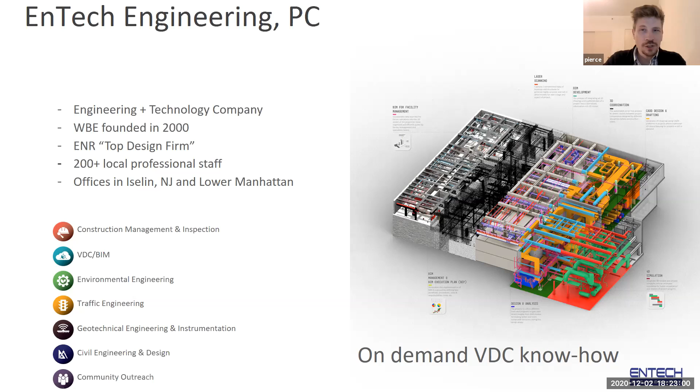Speaking of VDC, I think it's important to couch this whole thing in my particular take on what VDC is, what the role means. In general, I think everybody on this call knows that it's a disciplinary umbrella for all the technology in the AECO industry. The way I look at it is that it's like product management. Product managers in the software and technology world sit at this nexus between the people who make the technology, the customers who buy the technology, and the business itself that's thinking about what the profitability is going to be and what the future of the business is. And so product management sits in that middle spot.

I think VDC has a similar role, except our client is the project team. And once again, I'm coming from a specifically construction background here. And then our business side is our stakeholders, which are our owners, our account executives, the partners at the architecture and engineering firms we work with, and we're really trying to help everybody connect and bring that all together around technology.

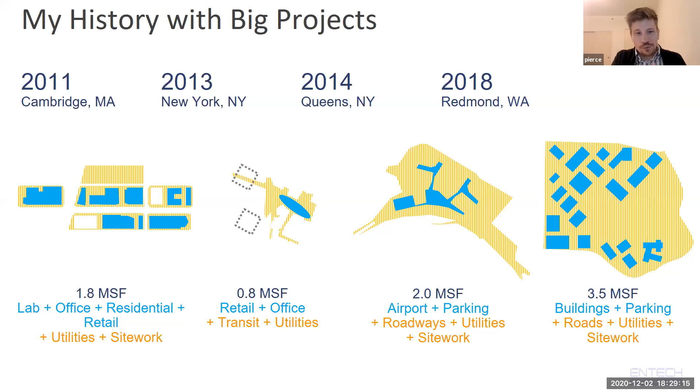And the last thing I worked on at Skanska was this Microsoft campus out in Redmond, Washington, just outside of Seattle. I would fly out to Seattle once a month, and it had 15 buildings, 3 different primes and 5 different architects, I think. Just this massive sprawling campus of a project. I was brought in to do the BIM execution plan. It was a great moment because I had just spent all these years learning all these things on LaGuardia, and now I could come in to help. When you'd go into the meetings, 15 different entities would be in a room. We had to have this giant room with 20 people in it in order to go through issue by issue what we were going to figure out.

So that's the history. What does it mean when we talk about scale? I think we talk about it along two lines. The first line is size. That's the physical extent of the thing, just how big the thing actually is; the temporality, which I also mentioned, the fact that big projects take a long time to design and build, so the decisions you're making have to work not only now but 5 years from now; and then multiplicity: not only is the thing big, but it's made out of a lot of things. So you don't have to do something just once, you now have to do it 100 times, 1,000 times.

The second line that we think about scale along is complexity. So interdisciplinarity: big projects have every discipline you've ever heard of and a bunch you've never heard of. When I think of the World Trade Center, I can never forget how we had 4 different electricians involved with the coordination.

We had kinds of systems that you only have because it's an infrastructure project. When you're working on the airport, you have baggage, literally the baggage conveyor system, not emotional baggage, but you get that too. You have to deal with all these disciplines, and every discipline is going to use the best-in-class software for their discipline. So you end up with this multi-platform problem as well: some people prefer CADvent, some prefer Tekla, and some prefer Revit.

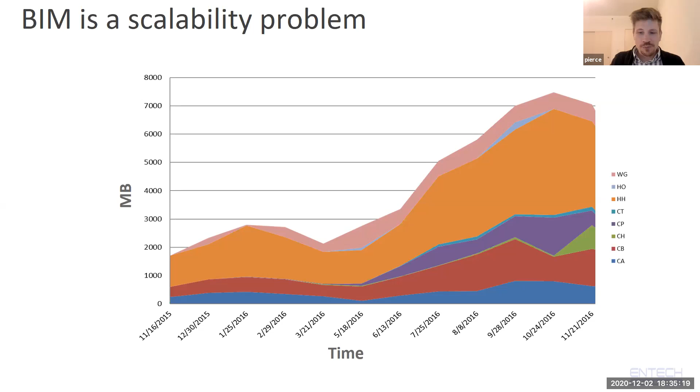And so these big files become many smaller files. They get split up and become smaller and smaller. And once again, the scale just takes a different form. Now it becomes multiplicity as well as size. The clash detection as well, kind of stemming that tide: as that element grows, how do you keep dealing with that complexity and keep the clashes down?

But certainly back in 2014 when we were working on LaGuardia, we really did not have a great platform solution. Procore was still just starting to really gain dominance at that time. Like I said, BIM 360 didn't even have Revit collaboration at that time. ProjectWise was as painful as it is today. I don't know if there was much of a change there. So you're still working with all these different platforms that don't come together, and then trying to stitch them together.

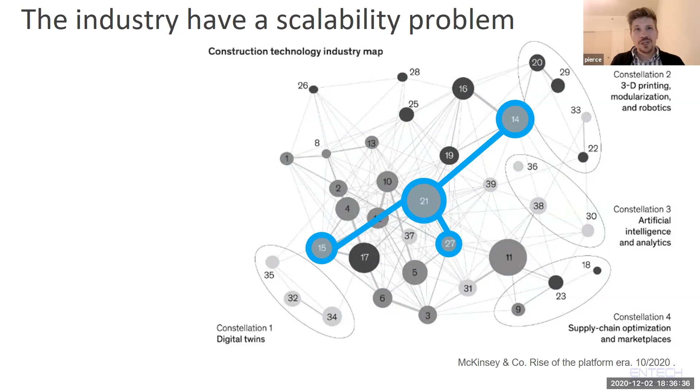And back to that idea of VDC, this is how I've always seen the role of VDC: it's this fragmented industry, and VDC's job is to connect all the dots. So let's move into talking about LaGuardia. I'll move through this pretty quickly.

First, it's important to give a quick shout out to the LaGuardia team. These are all Skanska-Walsh folks on the screen, but it's also worth mentioning my colleagues at HOK and WSP Parsons Brinckerhoff. Probably a few of you are on the call right now. The work that I'm showing you is the work of this team. It is not my work alone, and I'm not trying to represent it that way.

A little bit about LaGuardia. I feel like a lot of people already know these stats by now, but I'll move through them quickly. It's a $4 billion project; the client is the Port Authority. Vantage is the airport operator, so they're also our client. We were working on the project back in June 2014. Work didn't officially start until 2016, but because of the competition, we were doing full design prior to the award in 2016. In fact, we were actually doing construction prior to 2016. We were preferred bidder, I think, in 2015.

It's a design-build project. It's a P3 as well, a public-private partnership. The design-build entity consists of a construction joint venture, Skanska and Walsh Construction. That's Skanska Building and Civil. The design joint venture is WSP Parsons Brinckerhoff and HOK. They've got less than 2 years to finish it, but I'll show you a picture in a minute that shows they're well on their way. And after that begins a lease that goes through 2050.

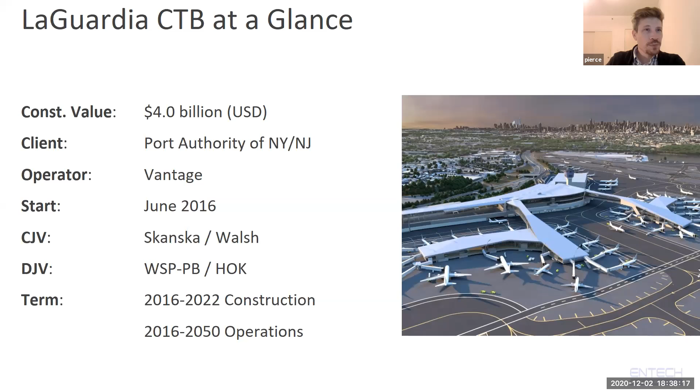These are the projects. I'm not going to spend a lot of time on the individual projects, but the point is you can see a combination here of civil projects. It consisted of a highway system really, as well as underground civil, as well as a central heating and refrigeration plant. That's the CHRP on there. And then of course Concourse A, Concourse B, and then airside, which was all the apron work and all the civil underneath the apron work.

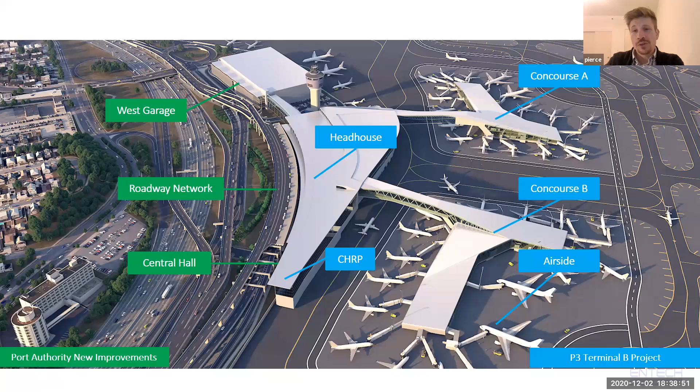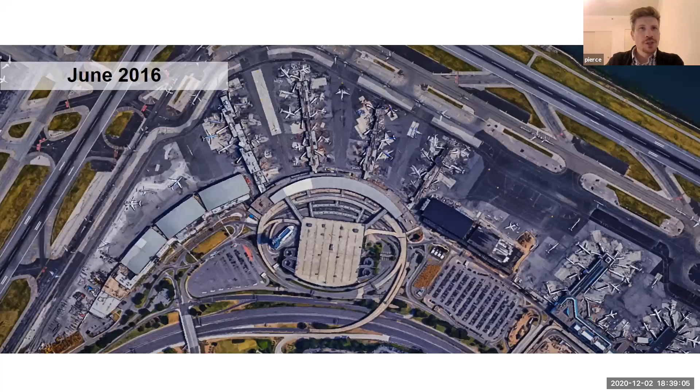It looked like this in June 2016. They were already demolishing the old LaGuardia terminal. This is what it looks like as of September. You can see that the headhouse, CHRP, and parking garage are complete. So is Concourse B there on the right. And the first leg, that north leg of Concourse A, is already under construction.

Let's talk about some stats. Let's talk about how big this thing is. It's 5.3 million square feet of site, 2 million square feet of buildings, 7 years. Of the 14 projects, 9 were VDC projects. We've got 9 separate projects.

For 9 projects, that means 9 different design teams spread out across 5 cities, including people in Canada. To give you a sense of what it means to have 9 design teams, that's 300 engineers. And I'm not talking about project engineers, I'm talking about your structural, mechanical, et cetera, engineers.

From a BIM standpoint, and by the way, these are old numbers. If any of the Skanska-Walsh folks I mentioned earlier are on the call, you can correct my numbers in the question and answer. But back in 2018, we had 150 plus Revit models. We had models using 5 different authoring softwares.

12,000 CAD files. It's not that hard to get to 12,000 CAD files when you're doing Civil 3D, because every Civil 3D file actually consists of 3 separate DWGs. 350 Navisworks files. It's an average of 80 files per building. And then this is kind of a crazy thing, 15,000 sheets, which I know for a fact is fewer sheets than we have now because we've been through several bulletins since.

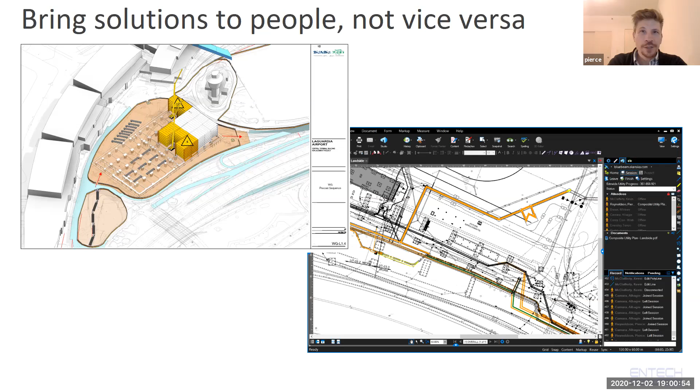So don't be afraid to bring the solutions to the people. As much as possible, try to make solutions that are click and open. Things where people don't have to know anything to really do it. Even with Bluebeam, if you don't know anything about Bluebeam, you still know that if you double click on a PDF, you can figure out how to scroll through that PDF. That is better than putting that solution in Navisworks or CAD or anywhere else.

We actually did a lot of work with our civil team where we would simply give them overlays of Civil 3D files that we put in Bluebeam. And once again, if you can automate it, no big deal. It's not really any skin off your back to do that for them. Instead of trying to teach everybody Navisworks, just publish a video. Put the video on your project site and make it something people can click on. It's a lot easier for people to click, rewind, and fast forward on a video than it is to figure out how to navigate Navisworks.

We did scan everything, by the way. I think it's one of the smartest things we did, doing LiDAR point clouds. The team scanned at every major installation milestone, and it saved us dozens of times. At the same time, I don't expect everybody to understand how to use Autodesk ReCap. 360 cameras are cheap. At like 100 to 150 bucks, you could just give them to project teams and then show them how to set it up on the construction site.

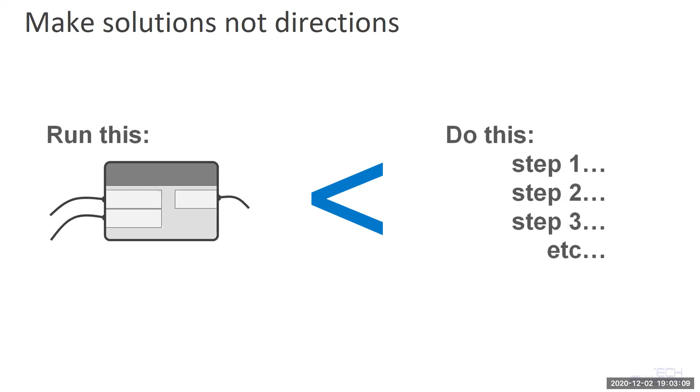For your partners that are modeling, make solutions. Don't give them directions on how to do something, because once again, that's just a pain. Instead, give them solutions. Package the solution as something that they can run in Dynamo, packaged as a plugin. Robert Otani's probably thinking of the amazing Dynamo packaging tool that TT Core has developed. I forgot what it's called, but definitely worth throwing into the chat. We did not have that back in 2015, so we just made these Dynamo scripts that we would give for our design partners to run on their files.

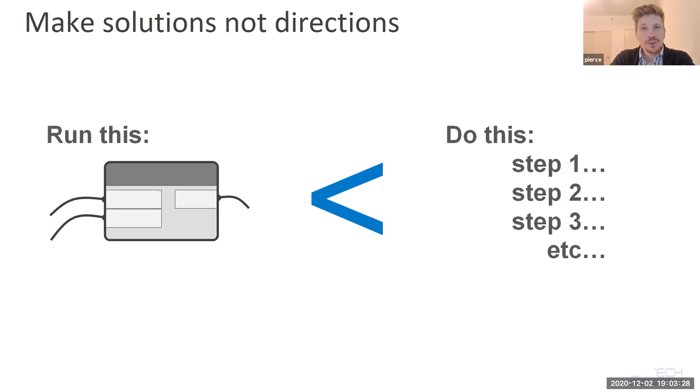We developed custom plugins, scripts, AutoLISP routines. I'm trying to keep this moving, so I'm not going to go through all of these right now, but basically things that chop stuff up for the 4D model. We had to do a full site 4D model every month. I don't think I'm going to have time to talk about this one. I think I need to skip over this, but I'll talk about it very quickly.

If the implementation is hard to explain, it is a bad idea. We tried to do this sort of... Case Inc. developed this incredible workflow and plugin for Jira. Long story short, we got this plugin and we were going to finish developing it. Case had disbanded at that point and we couldn't get anybody to finish the development for us. We spent a ton of hours on this. We hired developers to actually help us finish it. And the thing just did not work. And it frankly is because you couldn't implement it.

It was too complicated. We had to find developers for Jira that could also do the Revit plugin and the BCF publisher and the Navisworks plugin. Having those plugins meant we had to install and maintain our own piece of software for 50 plus people. It also meant that every trade coordinator had to learn Kanban because this was a Kanban workflow. The basis of this, by the way, was the idea that deep coordination is just like debugging. There is a Case presentation on this somewhere out there. But at the end of the day, trying to teach 50 plus people Kanban was just not going to happen. So the thing ended up really dying on the vine.

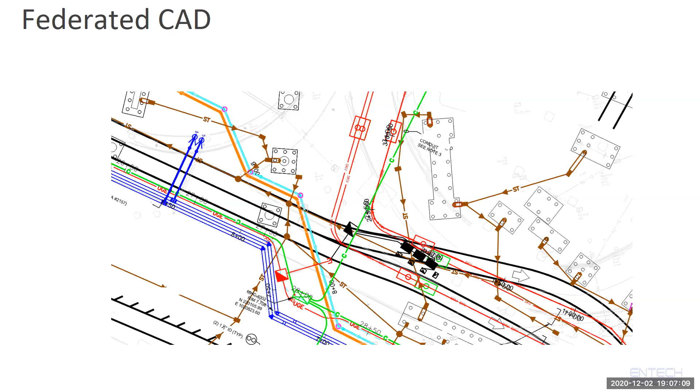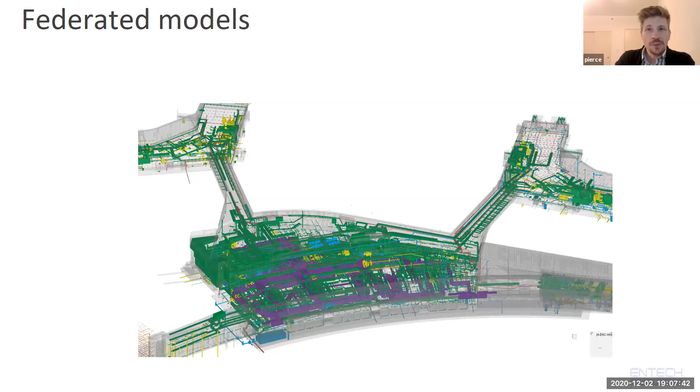This was our 4D model, which kind of combined all of that stuff that I just mentioned. When we'd package this each week, it would be 800 megabytes, which was a real strain for Navisworks back then. Probably still is. I think actually, I take that back. It was over a gig in the end. And even the Port Authority, who would run this and combine it with like the Delta Terminal model, would have to run on kind of a specialized machine. I'm just going to kind of click past this one.

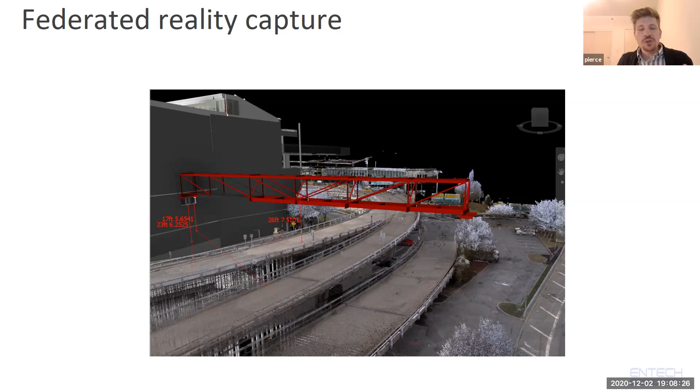Having all those models in one place, being able to combine them with the laser scans as well, just became critical. What it ended up meaning is we had just a million ways to kind of slice the site, and then we could break these out anytime we needed them. We really tried to have models easy to access for people. We posted links on the homepage of our project that people could access easily. I'm going to talk a little bit about how you actually build a culture in which people can actually leverage the model in a minute.

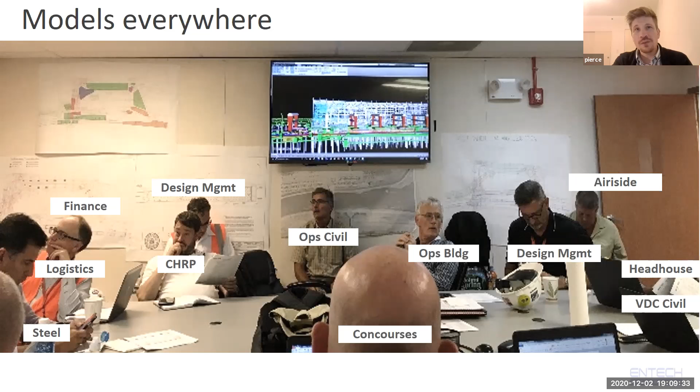But this became a way on big projects. So often the conversations you're having are, you're trying to basically play charades. Well, not play charades, but you're trying to describe these geometric conditions that are incredibly complex, incredibly large, and you're all trying to picture it in your head. And there's nothing better than just simply having that on the screen. But once again, doing that required all that automation on the back end. It also required having the coordinates locked in absolutely from day one.

It meant we had to have 2 or 3 different quality checks to make sure that the survey points lined up. And then we had to make sure that everybody who came on the project, like as trade contractors came on, also went through this check process. Because this whole thing falls apart the moment you put 100 models together, and the 101st model is 200 miles this way. So survey control points in every model.

And when I say survey control points, I don't mean the standard control point and base point that comes with Revit, but actual survey control point objects that we could use to verify across not just Revit, but also Navisworks, Civil 3D, and CAD/MEP. Control point drawings in every model. So we had each designer produce a drawing in their set that actually showed the control points, to I don't remember how many decimal points, but whatever was for survey control.

And by the way, because we did all that work up front and maintained that work the whole way through, it meant that we were able to use our model as a surveying tool for validating survey the entire way through the project, which would have been impossible otherwise.

The other thing about linking everything is for the data, you have to think about unique keys. A unique key is a parameter or a set of parameters that are static and do not change for an object, and not just a geometric object, but a data object. And so if you have 2 of those things, you can link them together. For instance, things like piece mark, equipment number, these are unique keys. Globally unique IDs are not unique keys. They get overwritten all the time, so you can't really use those. They need to actually be a thing that isn't generated by the software, that actually lives independently, that people QA/QC.

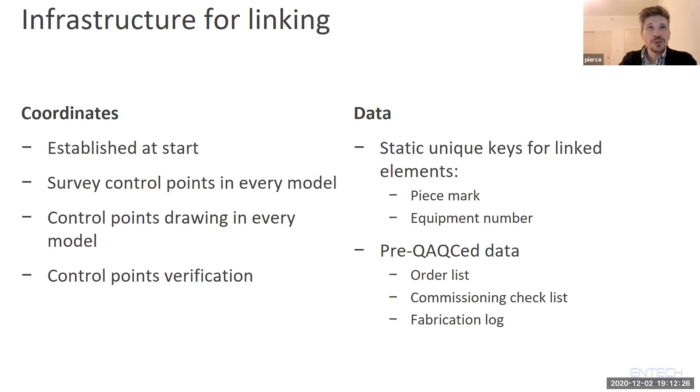Some examples of the data linking. We linked in steel information from the fabricators. We were able to do this through SmartBIM, also through iConstruct's data linking tool. I think we also wrote some data in using Revit, but I don't remember that. We tried to do everything kind of on the back end.

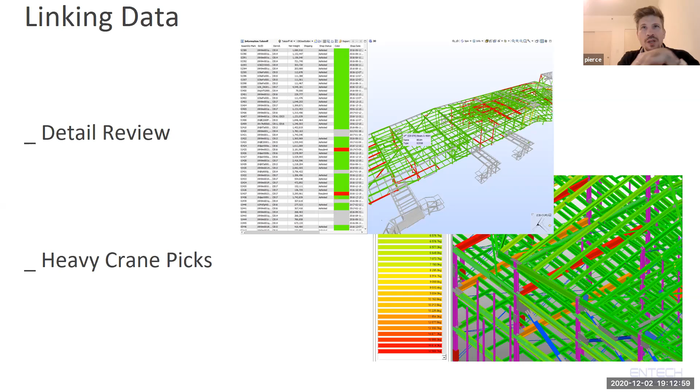Also able to get heavy crane picks from the fabricator, which our steel team was able to use to plan the erection sequence, knowing where the heavier crane picks are, which take longer. We did the same thing for prefabrication on the concrete members for the parking garage.

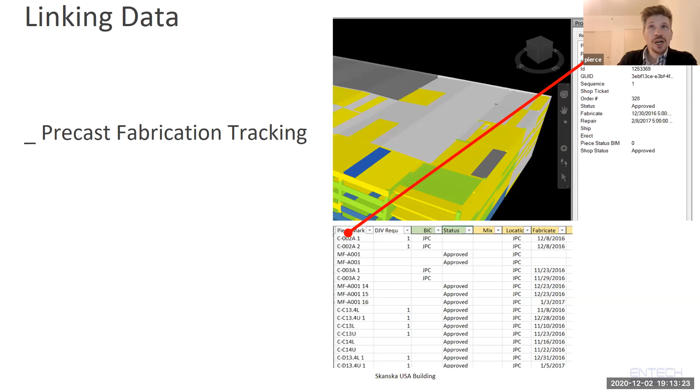Once again, linking the piece mark that's on the fabrication checklist to the piece mark that is in the concrete model itself. And once again, I trust those things because I know that the people who do them, it is their job to do them, and not because I'm asking to do it.

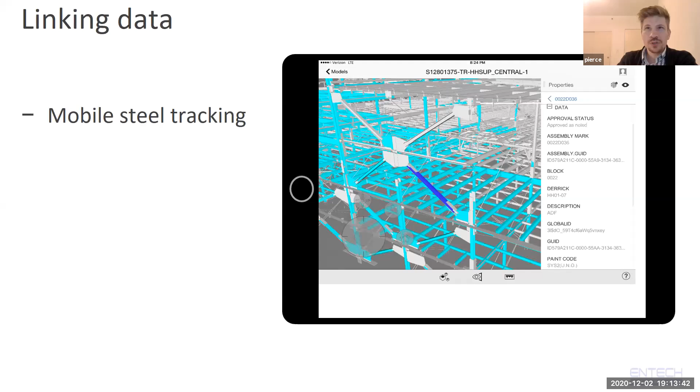We also had a mobile thing that we used, a combination of BIM 360 and SharePoint. That basically just allowed people to look up models by piece mark, and then they could also look at the status of these in SharePoint tables. By the way, this would be 10 times easier to do today because of Microsoft Power Apps. I wouldn't do this the way we did it now.

Hey, Dennis. Oh, sorry. Sorry, everybody says Andre Boss, so I keep thinking Andre's stopping me because I'm going long.

So this is the last section. I'm wrapping up now. Whatever cannot be simplified, support. And what it means to support is you have to build support structures. We kept thinking about this concept in the project.

IDEO talks about... okay. I'll just repeat that because I'm not sure where I got muted.

So IDEO, the design firm, talks about this idea of T-shaped people. The idea being that they have this broad base of knowledge and skills, but then they have a lot of specific depth in one or two areas of expertise. And IDEO's whole thing was that that's the kind of people they try to hire. Additionally, within VDC, that was also how we were trying to build out our team.

So we had this idea of, well, there's this baseline we want. We'd like everybody to know enough Navisworks that they can double click a file and just spin the model. We don't expect them to know how to do anything more than that, but they should be able to do that one thing. We expect everybody to know Bluebeam. We expect everybody to at least know what VDC does and who we are. And that was this 101 orientation we would do for people as they came on board.

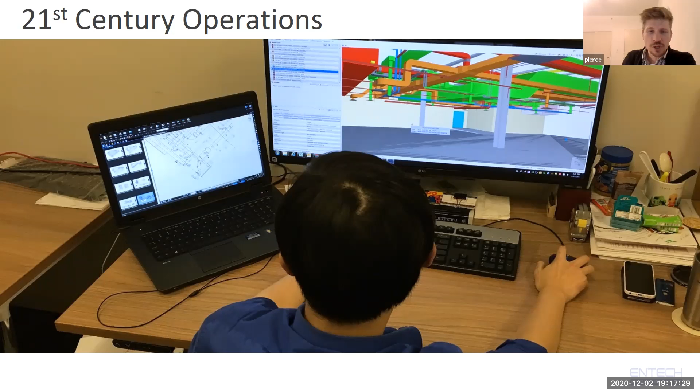Our champions, the model for our champions, are like Medwin here, who was also on our VDC team for a little while. But the idea being that we're trying to create, to my mind, an operations person who knows Bluebeam so well they can navigate a PDF in a smart way using all those modern-day computational PDF tools. And at the same time, they can look at that drawing. If they have questions, they can look at the model and navigate that. And they can use the model to ask questions of the drawings and the drawings to ask questions of the models. That was really the kind of people we were trying to create.

And then one of the last things we did within VDC is we built out our own knowledge database. We used Atlassian Confluence. So if it seems like I was throwing Atlassian Jira under the bus in an earlier slide, I'm going to now hoist up Atlassian Confluence. It was basically like a wiki for us. And this became the place where people documented best practices. When we would have new interns and new hires come in, we would send them here to be a place where they could scan.

I originally wanted this to be Stack Overflow, I think it's called Enterprise. But when I went to talk to the Stack Overflow folks, they said if I had anything less than 500 people using it, it wasn't going to work. So we ended up using Confluence instead. But we built out the wiki. People would go in, if they saw issues in it, they could edit it. We were also putting in research that people were doing here. We kept our meeting minutes in here. So it really just became this fantastic base of knowledge for us. And I still think knowledge management is a huge gap in the industry; frankly, I haven't seen too many that handle it that well.

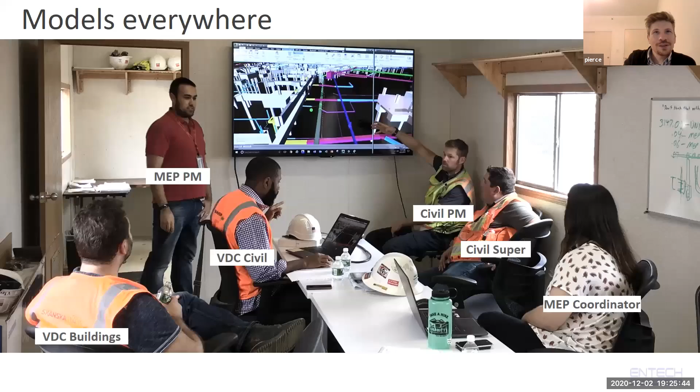The whole thing is this real kind of puzzle piece, because you have to have the central heating and refrigeration plant built first, because that powers all the other buildings. And then you can't actually finish the concourse until you at least have enough of a section, until you build a bridge going through.

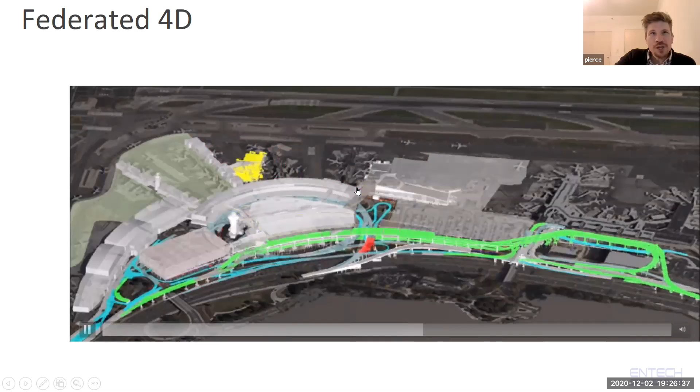If you look at this, there's actually a little mini bridge right here that's connecting. So you're still coming in through the old terminal and then going through this little mini bridge. And then once you get the next one active, you can demolish that piece. But then this is also being accessed through a little temporary mini bridge as well.

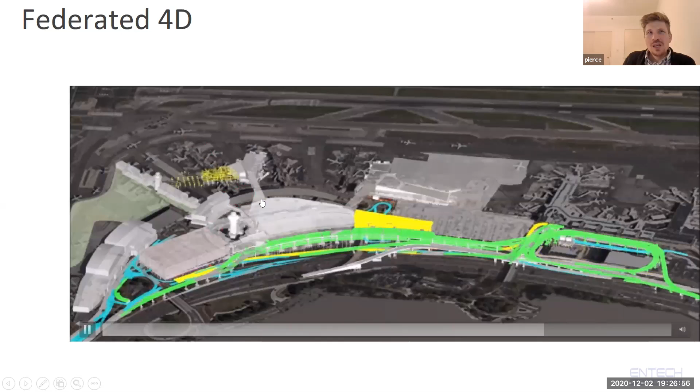When we were doing this during the early planning, we actually did 2D sheets instead of 4D. I did a special phasing model in Revit, and then that became, I think, 17 pages. And the funny thing about the 17-page phasing sheets is that we had a number of meetings where the first thing that would happen is just a 20-minute argument about what was actually day one.

Civil would be like, no, day one is this. That's when we're driving. That's when I'm demolishing this thing. And then building would be like, no, that's not day one. Day one is when I demolish this other thing. And it was really interesting watching all these groups come together. And once again, I can't stress this enough, you need visual aids to understand these things.

Okay. Gary is asking if Revit Server was considered in 2017, and if there was resistance from the Port Authority. I don't remember a switch. I left Skanska in 2018. To my knowledge, we were still on the server setup at that point. So we didn't do Revit Server.

We had a lot of conversations with Autodesk, and what it came down to at the end of the day was that Autodesk was looking at the expense they would have to incur in order to basically create a duplicate of BIM 360 or Revit Server on this secured server setup, and that they would have to have an entire other team assigned to it. So when we were talking to them, it seemed very clear that it was going to be a big lift for them.

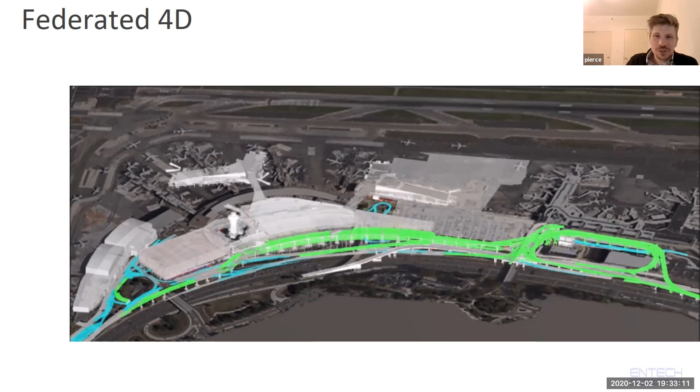Nobody seems to really get the IFC schema. The buildingSMART documentation is really hard for me to understand. So yeah, I guess the short answer to your question was the geometry was sufficient, but a lot of other things were insufficient.

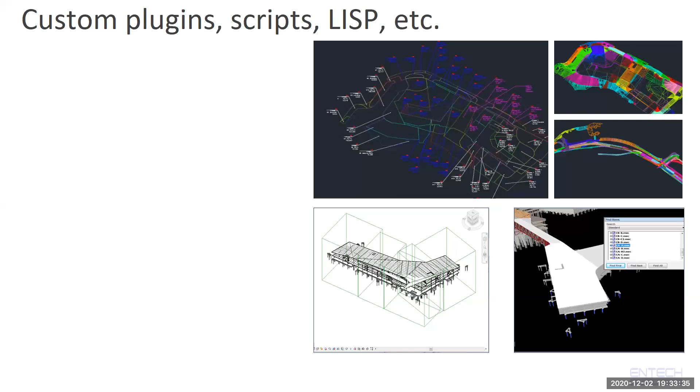Okay, what else? Oh, my pet peeve, quality control. You said the more automation you do, the more important the human becomes. Something of the kind. And you said you learned it the hard way, right? Which is kind of what this group is about. Somebody learns it the hard way and then we all ride your coattails.

What would you do better? How would you anticipate or plan, organize around that automation and then do your human QC overlay, so you don't show up Monday morning and a little mistake has occurred 500,000 times? Yeah, absolutely. How would you tackle it in the future, I guess?

I think back when we were doing this and we had three different plugins, that's kind of a big problem with the industry, is that these are all point solutions, not platform solutions, and also because most of the platform solutions don't even have the automations built into them that you want, you end up having to have five different automation solutions.